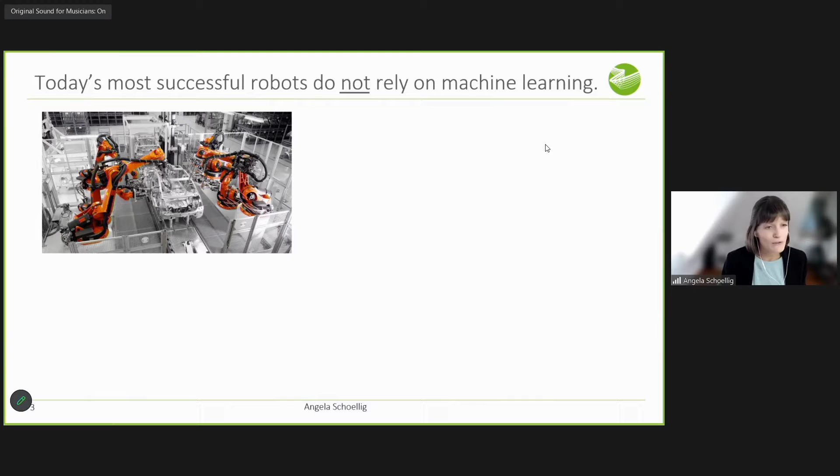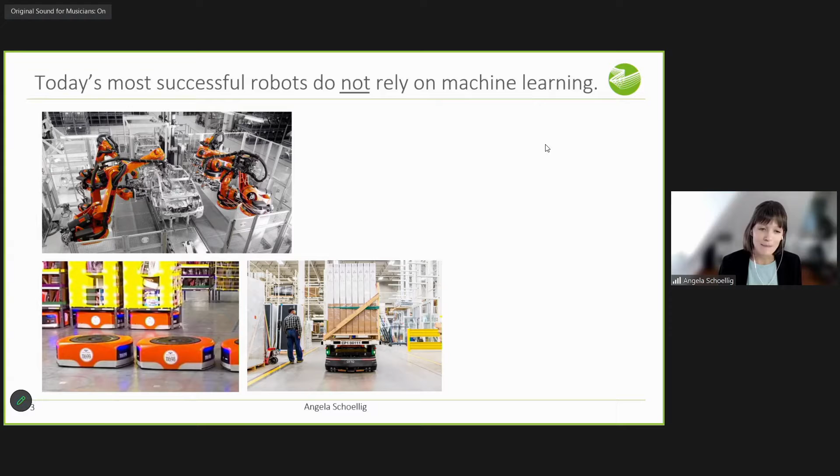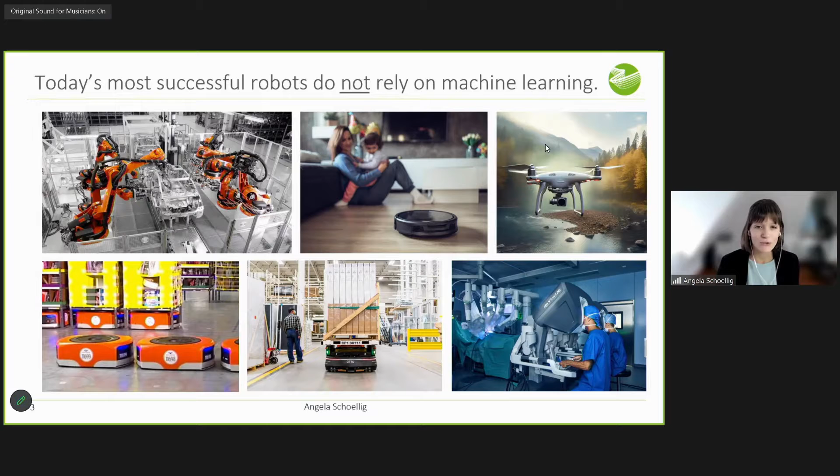And maybe we should also put there a question mark. I mean, can we? Because if we look at today's most successful robots, they do not rely on machine learning. Most of the robots are still in an industrial setting, in industrial manufacturing, in warehouses. Here we see also a Canadian example with OTTO Motors. Some of them made it into our homes as vacuum cleaners or as flying cameras. But none of these examples really rely on machine learning. And neither do much more advanced tools such as the Da Vinci robot. So where is machine learning?

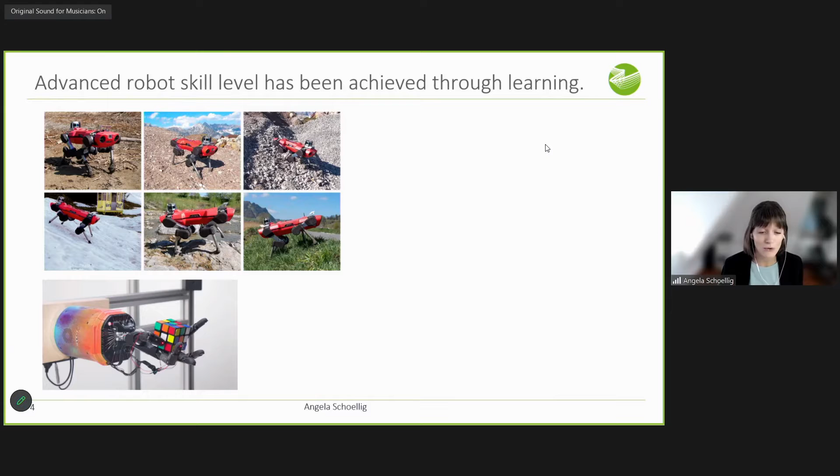In research, we've seen that machine learning really can provide advanced robot skill levels to complicated robots, such as walking robots, where they learn from experience and in simulation how to navigate very challenging terrain. There has been this example from OpenAI, where a robot hand solves a Rubik's Cube, something that I wouldn't know how to do without machine learning. There are other companies that do bin picking, and machine learning has a big impact in this field. And we have seen other amazing bimanual skills, such as opening a lid or putting objects in narrow spaces.

But so far, those techniques still require massive compute and data, often rely on high fidelity simulations that are not easy to come by, and transferability of the skills is still a challenge. So they can maybe demonstrate this in the lab, but can they demonstrate it in the real world, in real applications and as a product? And typically, these approaches also have no guarantees of safety and performance.

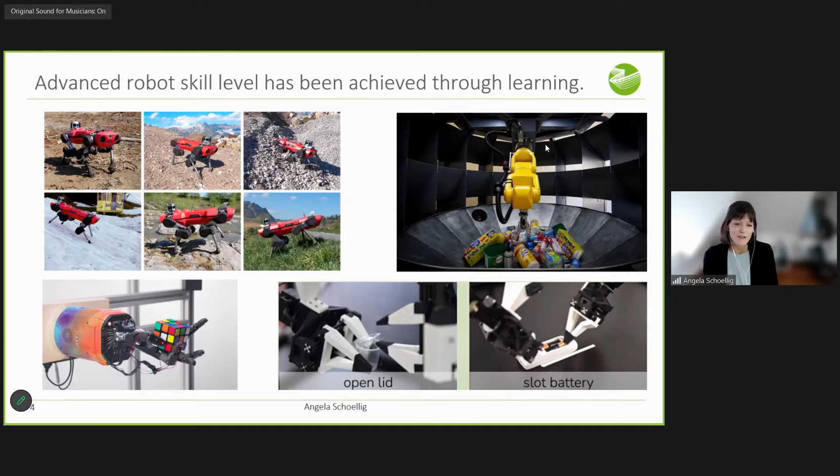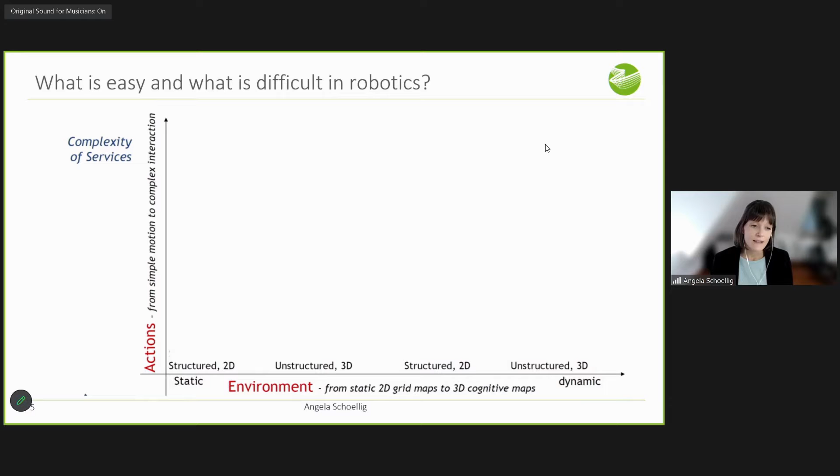So maybe we'll take a step back and think about what is actually easy and what is difficult in robotics. Here I have this two-axis grid where on the y-axis I describe the complexity of the service—how difficult is the task that a robot should do? That ranges from a very simple, repetitive motion, like an industrial arm, to complex interactions with the environment. And on the x-axis is the environment they operate in: is it very structured and known, or unstructured, with lots of dynamic objects?

And so the majority of the robots in the first slide I showed you fall in this bottom left corner. They can do partially amazing skills—here you see the Boston Dynamics robot doing a flip, right? But this still is a single task in a very well-known environment. And so these tasks are generally easy, and usually they are solved by control theory in a model-based fashion because we know everything about the task and the environment ahead of time.

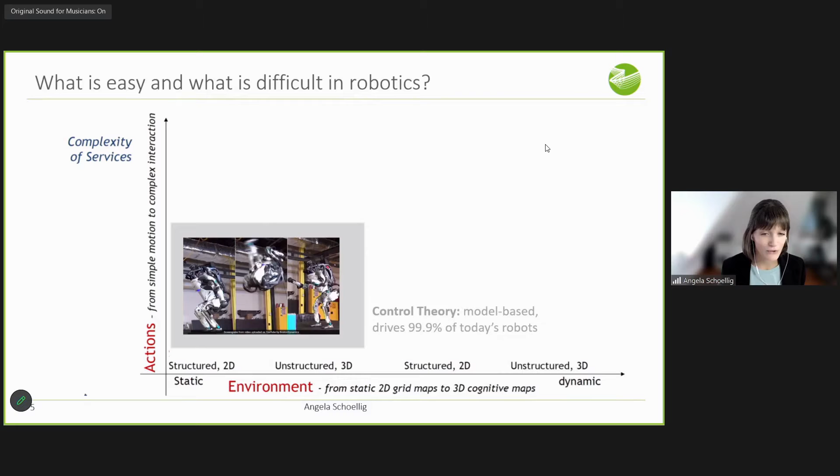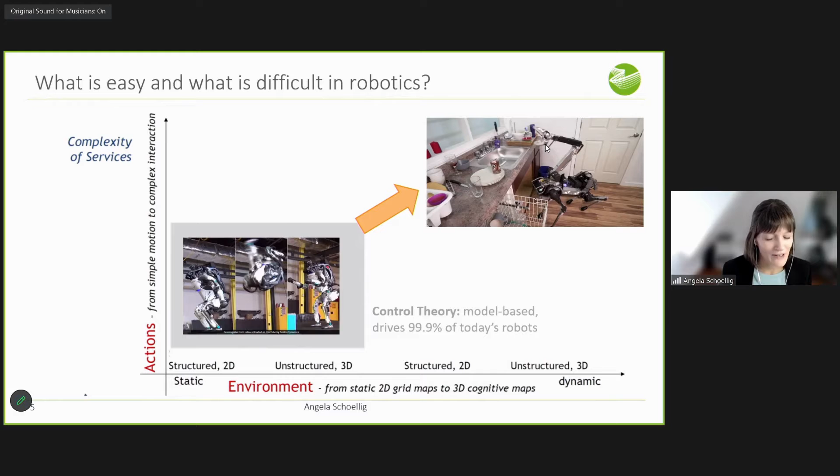However, if we aim to move robots out of those application areas that we saw initially, where they have made very important strides, we want to move to the top right here: unstructured environments such as our homes, hospitals or roads, and very complex tasks and interactions with the environment, interactions with humans, and high-level instructions where they have to decompose the task into multiple steps. And if we want to go this path, a model-based approach where we rely purely on our a priori...

I'm so sorry, I don't know where I cut out, and I hope it was not on my end, but maybe it was.

I'll share again. Yeah, was it where I dropped out? Yeah, this looks like the slide where you dropped out. If you want to just pick it back up, we're good to go. Thank you, okay, sorry about this.

So we want to go to the top right, where robots have to deal with increasing uncertainty as they get closer to us, because they operate in our human-centered environments, in environments such as hospitals, homes, and on our roads, where safety is an absolute requirement.

So I started my journey at the bottom left, and I want to briefly highlight how we have solved problems in the past and how we can expand from there.

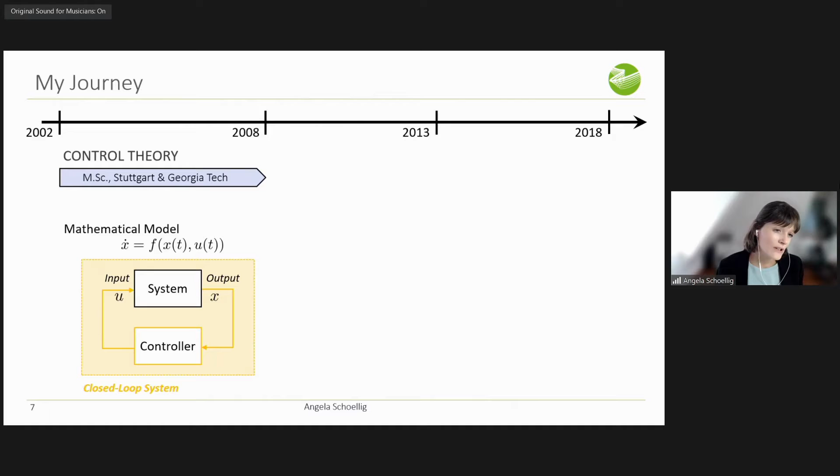So I started in control theory, and control theory means understanding dynamic systems, so systems that change over time, and then controlling them such that the closed loop behavior is the one we intend to have, right? And so this controller is designed based on a mathematical model that we have of the system.

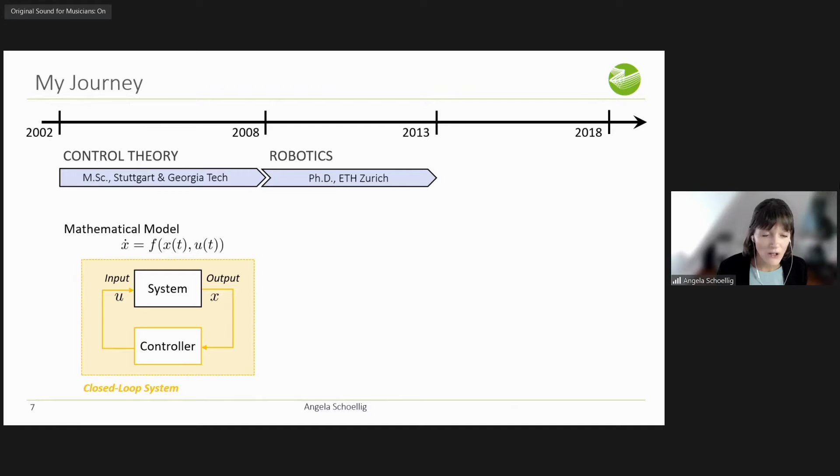Some of you may have seen this in courses. And then we want to achieve behaviors with robots using control theory. So in my PhD, I worked a lot with flying robots, and I want to show you one example from that time.

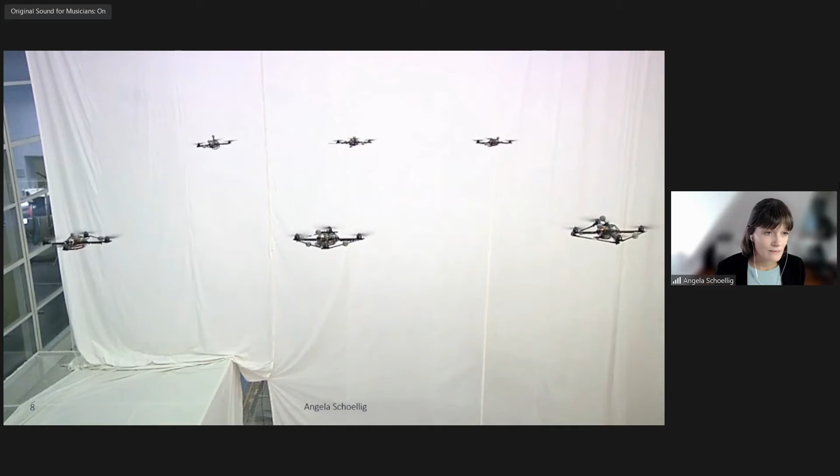In this example, robots moved along with music, and I hope you saw that and heard some of the music. So over 2.5 years, we created 6 choreographies of an increasing number of drones, ranging from 1, and at the end we had 6 drones, as you saw in the video.

How did we do this? We analyzed music ahead of time. We associated motions to it. So as humans, we did the choreography, we did a design, we used motion primitives such as circles and periodic motions, and those would be fed into a small trajectory adaptation module. You could call it a learner, but it's a very minimal parameter adaptation, and then they would be executed by a controller, and we would estimate the position.

So it was a hand-programmed choreography, you could think of each choreography as one single task in an open, empty space where the vehicles were very predictable. Nevertheless, this actually led to a performance on Broadway where a similar choreography was running in a Broadway show for over a year.

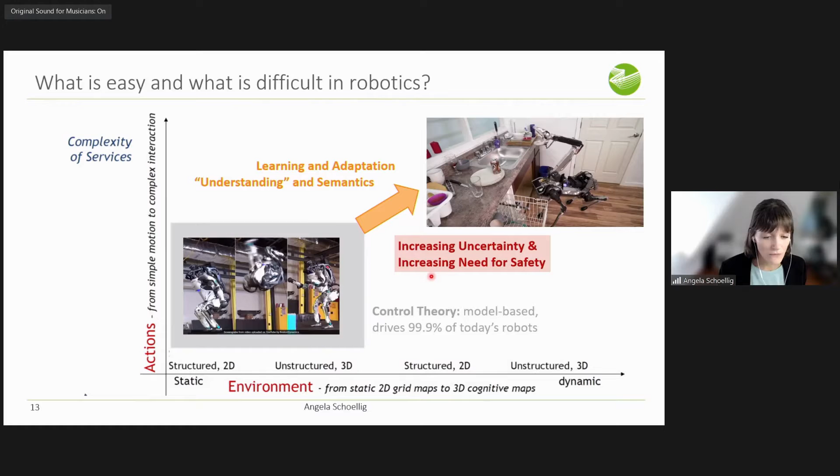The key part being, how do we deal with this increasing uncertainty while also having an increasing demand for safety? So the question I really want to answer is, what are the first steps that we can do to achieve safe and high-performance robot control despite uncertainties?

And so now I dive a bit more into the math, and later I come back to a few more high-level thoughts.

So robots' behavior in the real world is always in some way uncertain. There's noise, there's friction that changes, there is, with the more and more use of the robot, the behavior changes. And one way to model this is by saying, I have a very good a priori model of the system from physics, but there may be unknown components and there may be random noise.

So something that has a zero mean. And the same for our measurements. I may have a measurement model, but I also may have some noise. So this is the type of uncertainties we consider right now. It's still very agent-focused in a sense.

And the second question is, what do we mean by safety, right? I think that is also a question to answer. And there are three things that we mean by safety. State constraints, meaning that the robot stays in its limited space boundaries. This can mean, for flying vehicles, the room boundaries. For a self-driving car, this means staying on the lane.

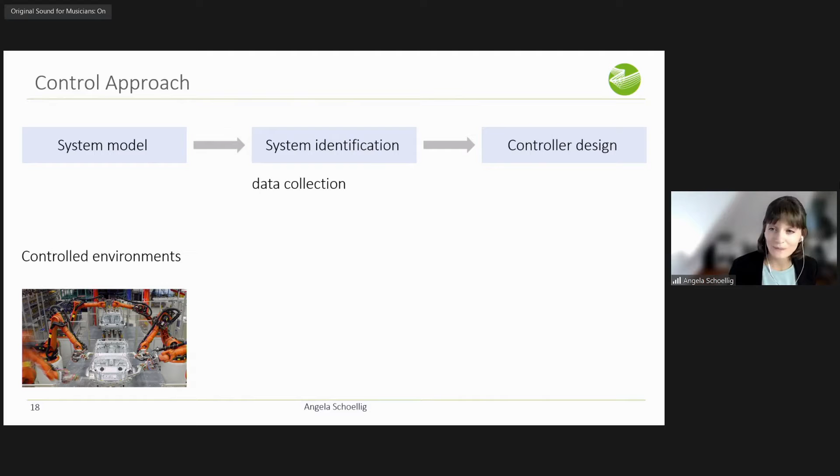The really nice thing about this approach is that we can actually test how robust we are towards errors. So even if we identified our model parameter slightly incorrectly, would we still stay stable and not hit the wall boundaries?

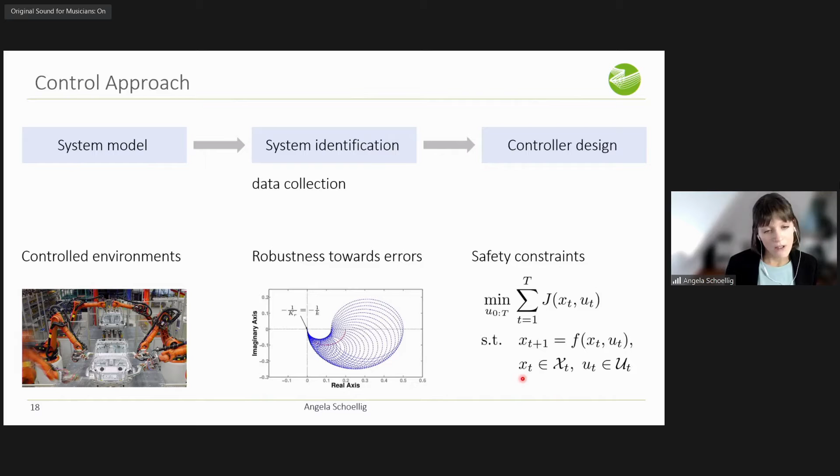We can even explicitly take those safety constraints into account if we follow more of a model predictive control fashion. If we had known that the mass of the robot is between certain boundaries, and we know a lower and upper bound, we can also take this into account and design a controller that works for the whole range of parameter settings. And that is called robust control.

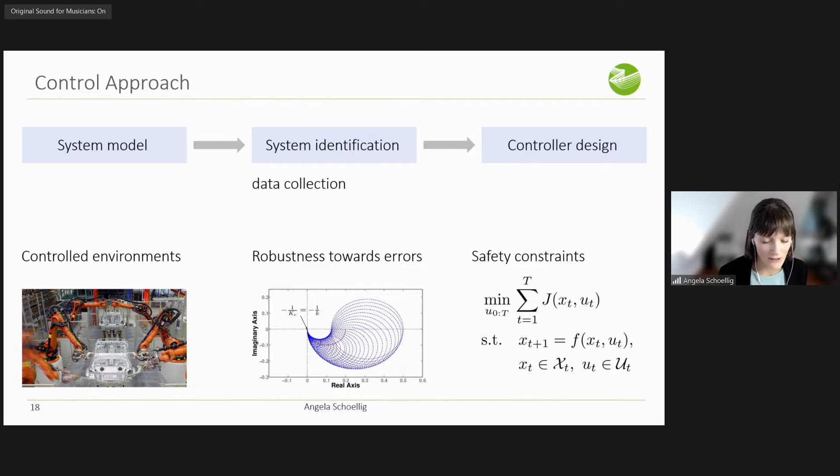But it's important that usually every normal controller you design, even LQR, has certain robustness guarantees, so can handle a certain amount of parameter uncertainty. And I show you a few examples just to show this can work. Works really well. Here, we try to introduce different disturbances.

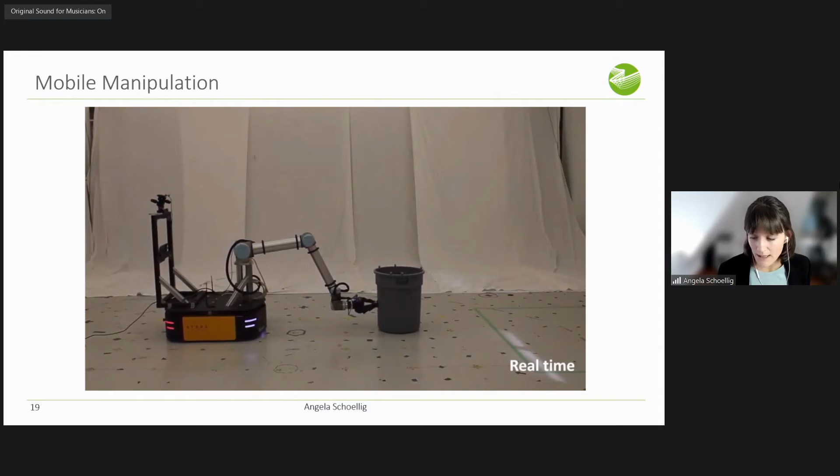Kick the bucket, and the robot can control this. Right? We don't need any learning for this.

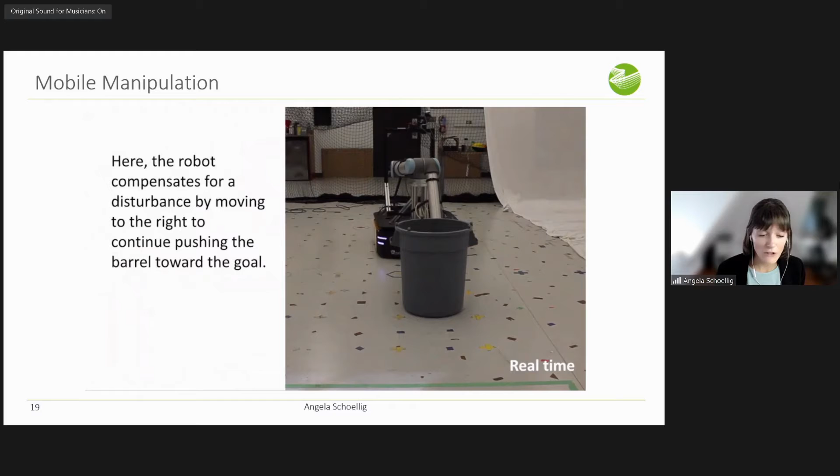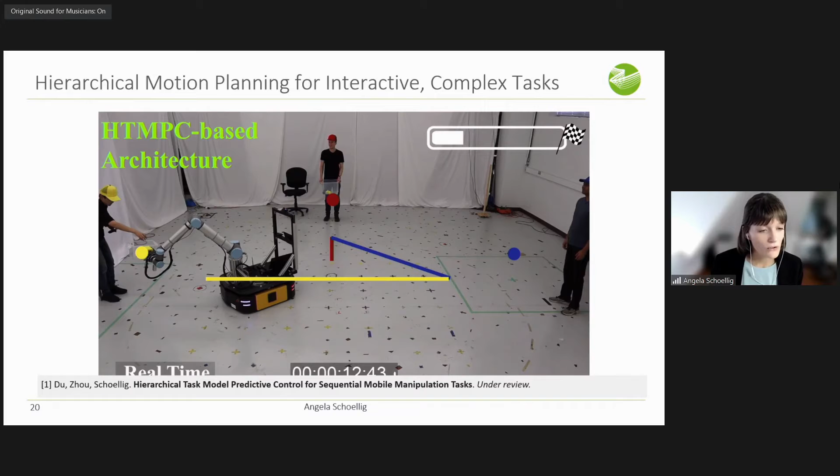Here we have a very recent work. Here we do a full body motion of the base and the arm, where the base already moves to the next person, while the arm still hands over the ball. So again, here there are model uncertainties, different friction coefficients, and still this works well.

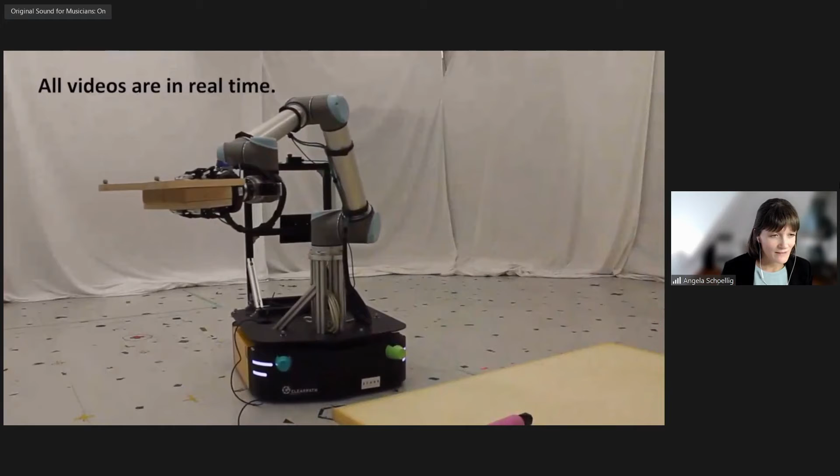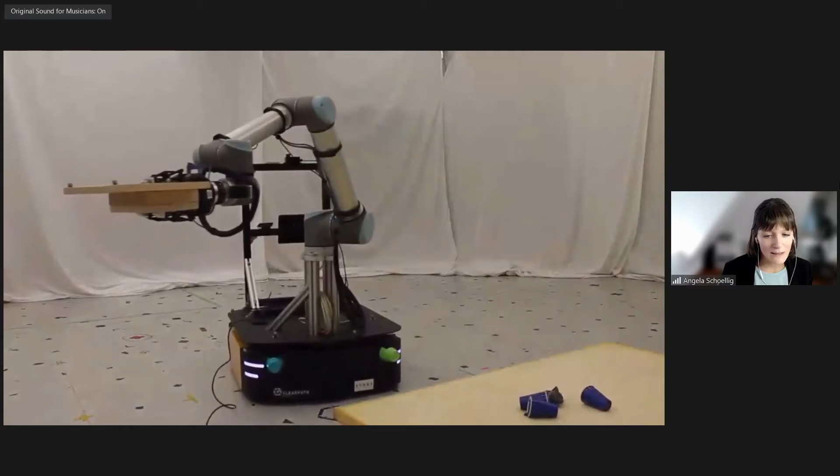And finally, maybe the best example of all of this is where we actually approach the problem as a robust control problem. So here we want to balance objects on a plate. And if we don't take into account that there could be objects on the plate, they fall down. But then we could make a conservative estimate about the objects on the plate, that they have a certain mass and certain inertia.

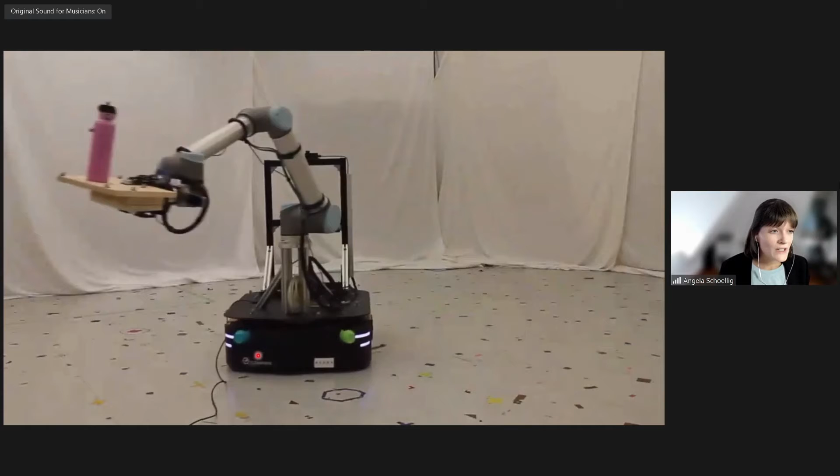And if we do that, then we don't need to know exactly what is on the plate. We don't need the exact properties. But with a robust control approach, we can balance the objects.

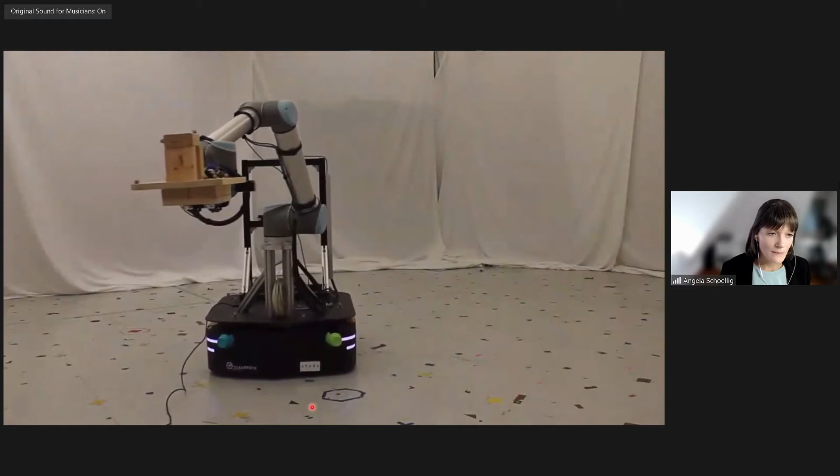I hope you can see those videos. So a model-based approach has a lot of advantages, and in a robust setting can even account for various variations in the system, even the object you balance and transport.

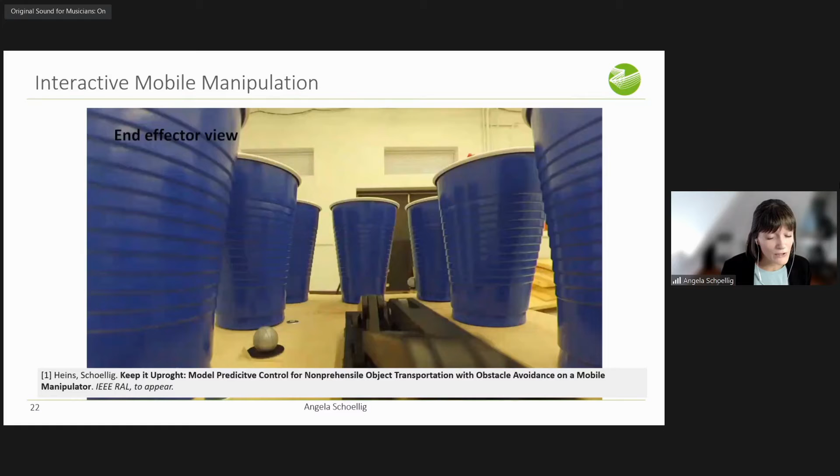So this is if we go at this problem from a completely model-based approach. The other main direction people have been pursuing is completely learning things from data only. This is usually from the reinforcement learning community, where they don't assume they know a model. Sometimes a model is very difficult to get, and instead they work with data samples only to optimize a controller. So the learner is the controller - it tries actions, sends commands to the robot, and observes what happens. Initially these are random commands, and over time it learns what actions actually get the task done.

It's also a very task-specific approach, because it evaluates the actions against a reward, against a particular task that needs to be done. But it collects relevant data for this task, and it tries usually to optimize the performance in terms of expectations - the best expected performance over the long run. So that's how it deals with uncertainty, trying to maximize the expectation of the performance.

It's still usually in a quite controlled environment. But there have been amazing progress based on reinforcement learning if models are really hard to come by, which in robotics is very quickly the case if you have interactions. However, many of the early successes are still in lab settings or in simulation environments that have very little noise.

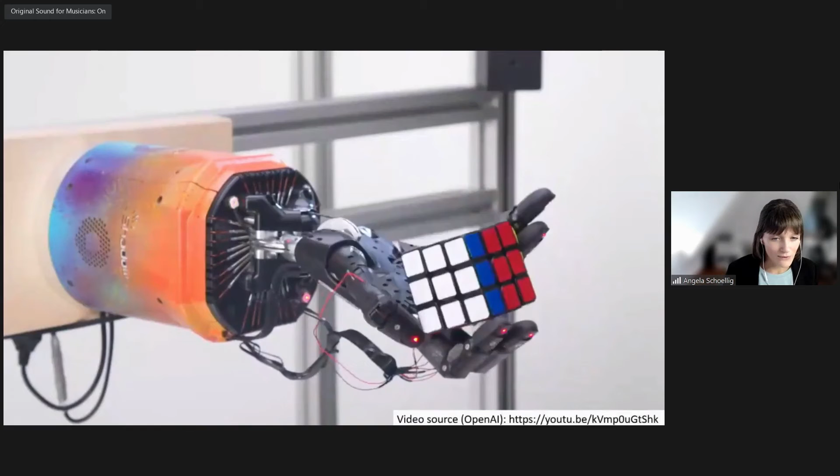One more recent example that was quite impressive is where a real hand solves a Rubik's Cube. This is a difficult task on its own, and then with a real physical hand. The thing is, what you don't see is that this only works 1 out of 5 times if we have a hard combination. So only 1 out of 5 times this reinforcement learning algorithm actually achieves the task. Otherwise it either gets stuck or the cube falls down. So if it would be a safety critical application, that would be absolutely not enough - doing it 1 out of 5 times correctly.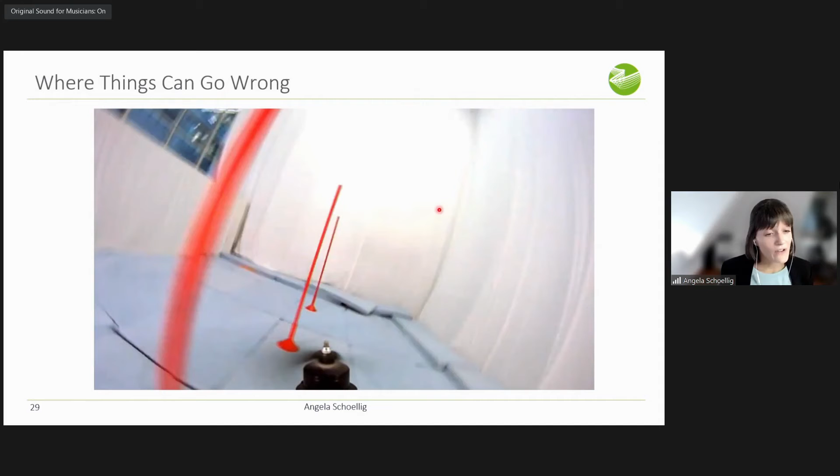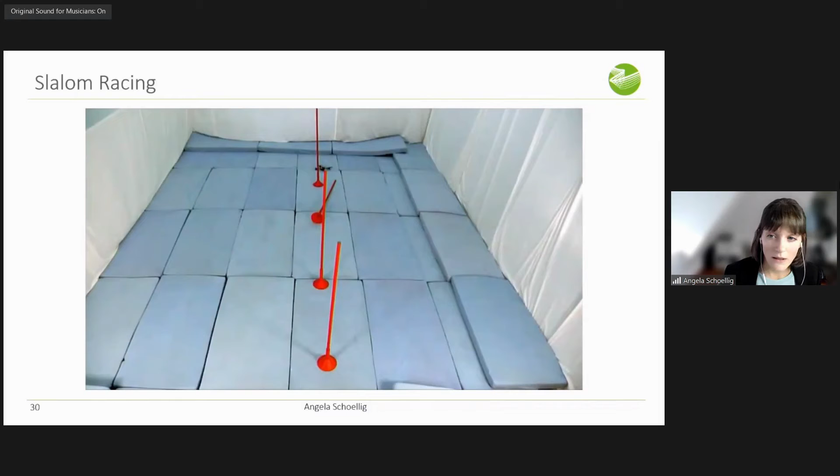And so we did this for slalom, flying there without learning. There are just too many uncertainties that were not considered. But we can learn the residual model error in a few iterations.

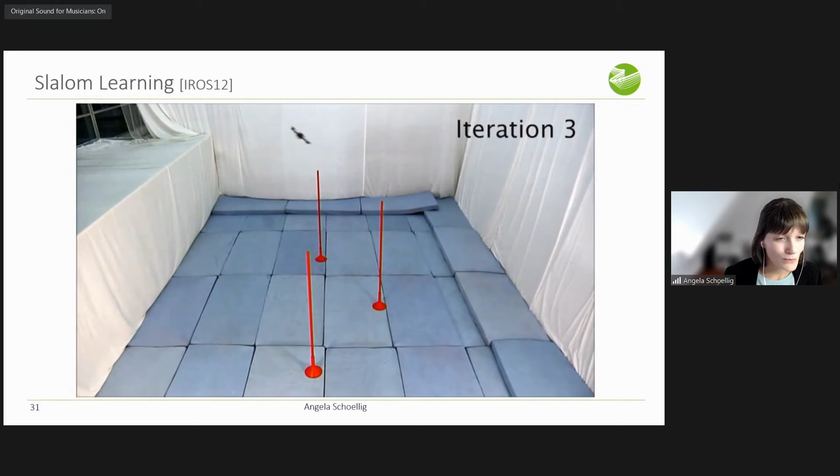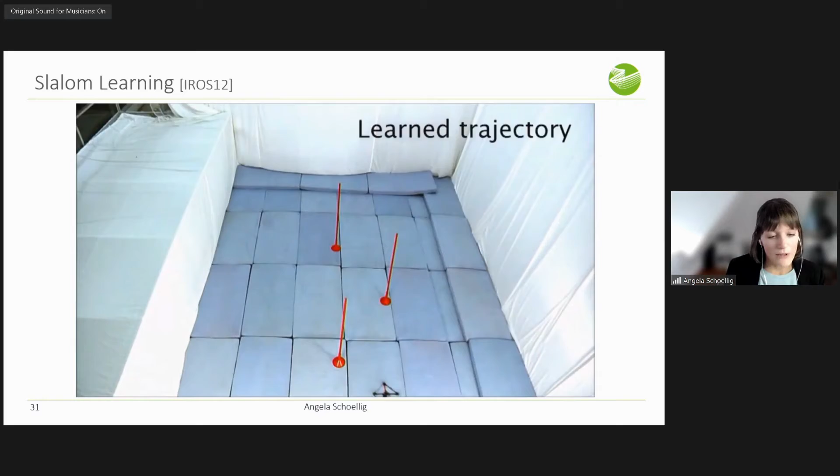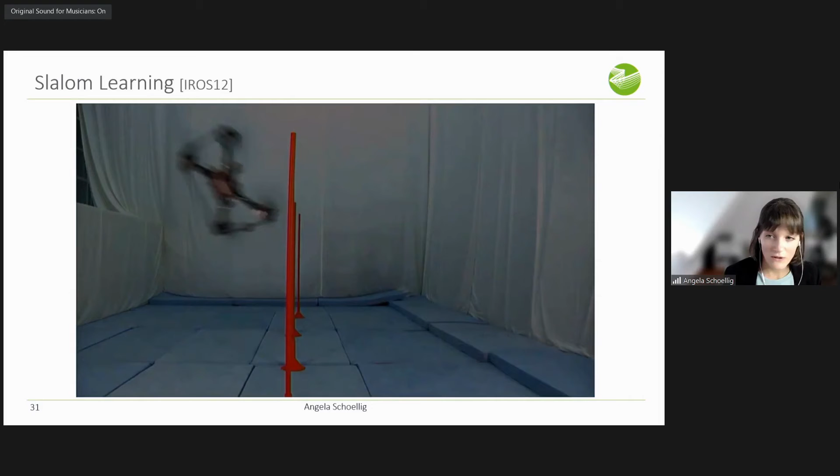I hope you can see it, otherwise I can send you links to the videos later. So we basically just have to learn the systematic model error, and since we correct immediately in the right direction, thanks to our simple model, we can do this very quickly. We can even learn things like a triple flip.

So the drone should do 3 times 360 degrees of rotation and come back where it started.

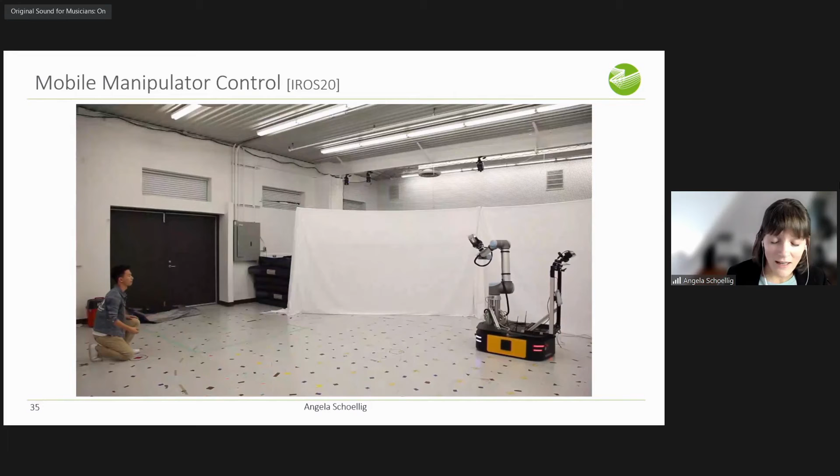So while this was still a bit of an academic example to show this, we also used it here when we want to show how precisely we can move a mobile manipulator to catch balls, where it needs to be very precise in time and space.

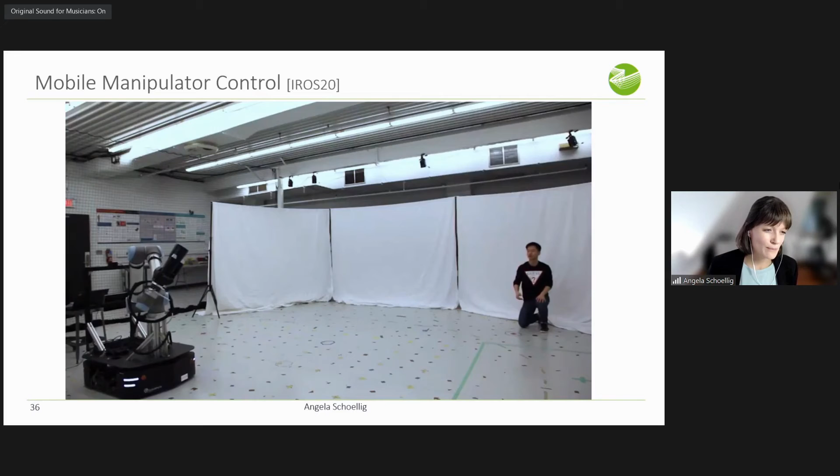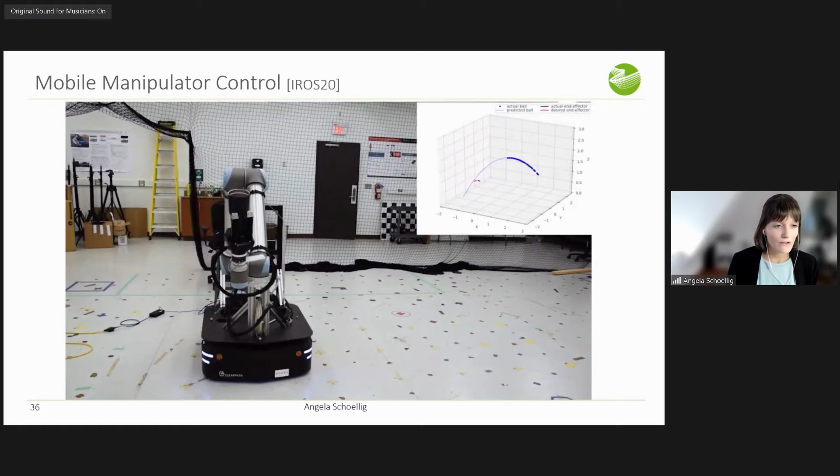And so here we use the same approach to add on to the existing tracking controllers of the base and the arm. So that's the nice thing about this approach as well. You can tag it onto any approach. You don't need to know the underlying controllers. You don't need to modify them if you don't have access. You just add it on top, and you can generally always improve the performance of the system.

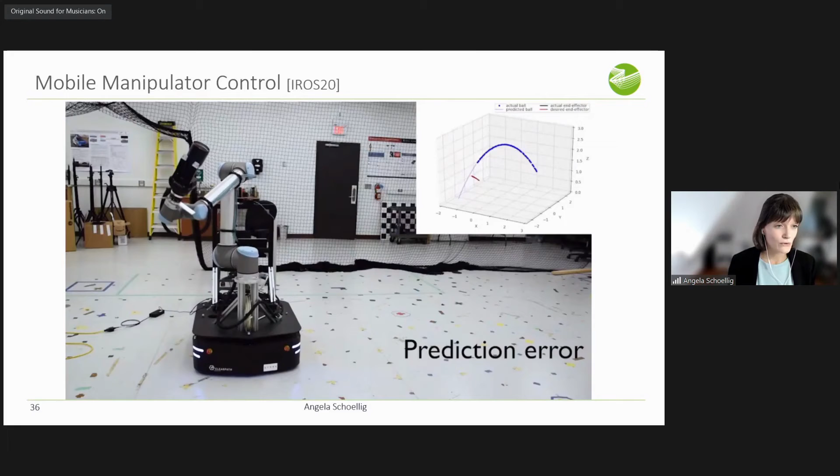You see, we are not perfect. Here we have a prediction error of the ball, and here we are not tracking very well.

So finally, one thing in this direction of an architecture is, what about if things change? If the system over time changes, or I learn something on one flying robot and now I want to use it on a slightly different one. Again, you can play with the feedback architecture and the feedback rates as well.

So the thing that now changed from the picture before is that we replaced the normal controller with a very fast adaptive controller, very quickly adapting to changes through feedback. So basically a quick self-tuning controller.

By doing this, and again choosing approaches where we have guarantees for the red box - for example, L1 adaptive control, as well as Lipschitz neural networks that we use - we can actually prove stability and also that the tracking error converges. One approach we use is we put a small neural network here that has a Lipschitz constraint, so it's a Lipschitz network. We also used L1 adaptive control.

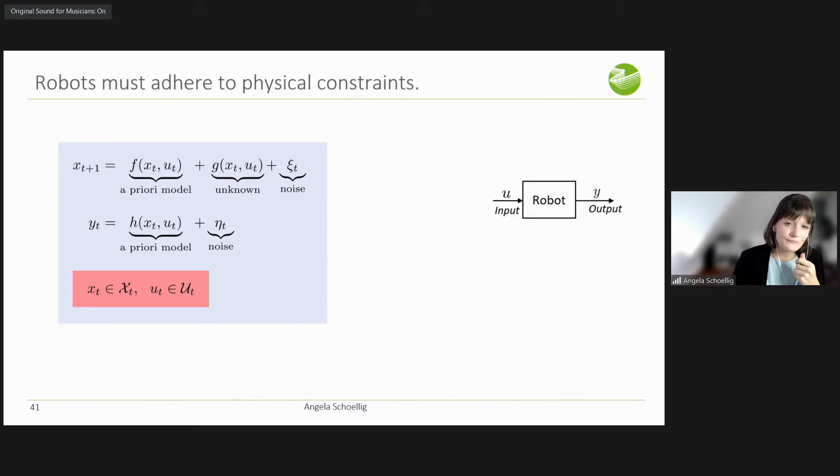So we have the same setup, and now the block diagram looks slightly different. Now we rely on learning the uncertainty in the model as the robot operates, and still doing this in a safe manner. For this, we use a probabilistic model called a Gaussian process and couple it with robust control.

And if we do this, what is different to a normal model predictive control is that basically we say with high probability, I want my state to satisfy the safety constraints.

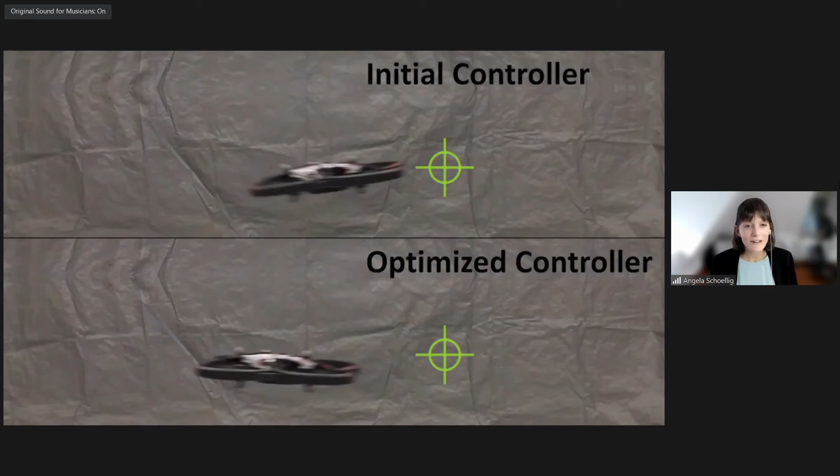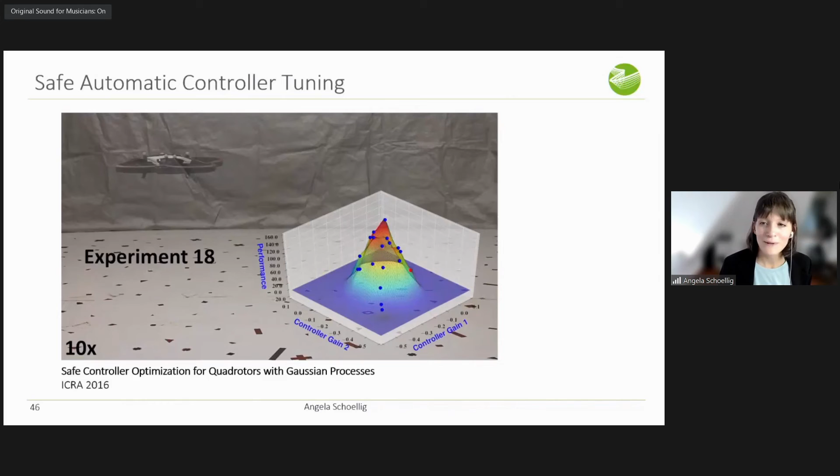We also made it a more generic approach to safe model-based reinforcement learning. One thing I want to show is we can use it to automatically tune controllers in a safe manner. Often you've tuned your controllers yourself in experiments, but you can get help with this type of approach.

So what it can do here is we can guarantee stability and performance. We don't need a training phase, and we can consider state constraints.

Of course, there are always limitations, and these are the overall setup I proposed at the beginning. We assume it's a disturbance that acts on the dynamics of the system directly. We make some smoothness assumptions, and certain hyperparameters of this Gaussian process may also not be easy to know ahead of time. Nevertheless, this is an approach that explicitly takes into account that there's uncertainty in the environment, which over time you may be able to find out from your data and reduce your conservatism.

The last thing I wanted to talk about is that there are two main communities dealing with control of robots in the broadest sense: the reinforcement learning community and the control community. Both are interested in working towards safe learning in robotics. So we did a broad review paper during the pandemic on this topic, because both communities are approaching each other, recognizing that data and models are very important to make progress in robotics. I highly encourage you to look at this paper if you're interested.

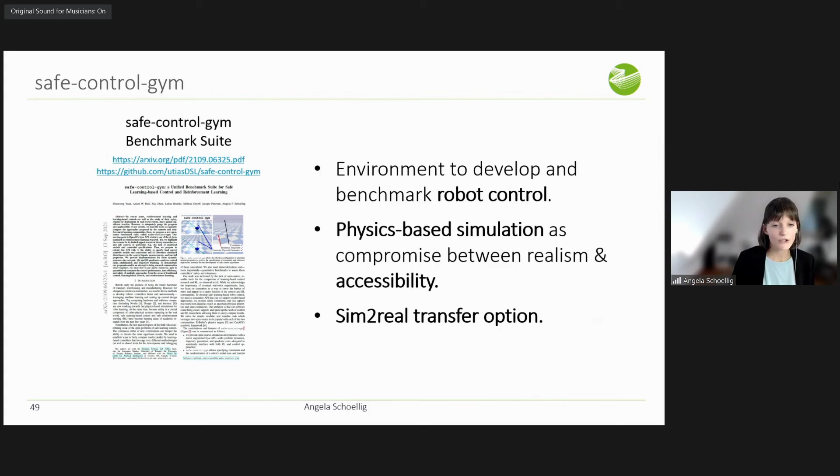And we have even for the quadrotor now a sim-to-real transfer option. So if you do a lot in simulation, we have a direct bridge to transferring onto a Crazyflie drone. Here you can really define prior knowledge and see how much your knowledge about the environment helps you do a task. You can define safety constraints, different disturbance injections, and we have certain simple systems like a cart-pole and a quadrotor, with tasks such as stabilization and tracking, though we're also expanding on these.

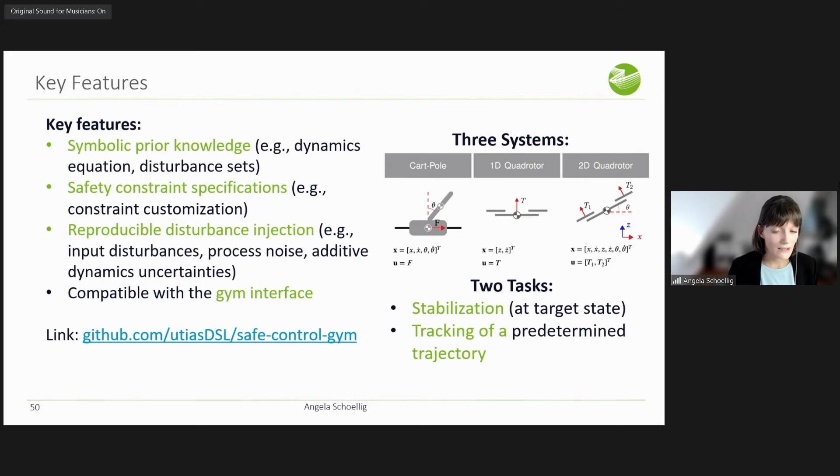But no matter if you do any work on the control side of things—model-based, model-free, or learning-based control—I highly encourage you to have a look, because lots of the standard approaches have been implemented, and you can compare your approaches against those: standard RL and control, but also some of the latest safe RL and safe learning control. We are just exploring this ourselves; we don't know yet where this will lead us, but it's the first kind of software framework where we can actually explore how prior knowledge helps us or limits us.

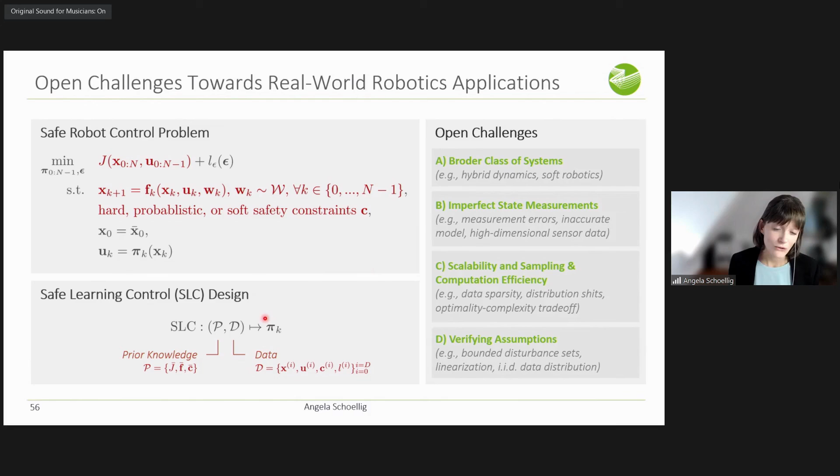One open challenge that I find very interesting, and we've done some preliminary work in this direction, is that robots infer automatically what is safe. I think we are close to being able to do this because they can semantically understand the environment and, for example, understand what each object is and how to safely interact with it. So that's also really an interesting direction.

So to finish this, the take-home messages are: machine learning will be and is essential to build more capable robots. Leveraging prior knowledge about the structure of the problem will help us design efficient and safe learning algorithms. I think there's no question about that. And I also want to emphasize that as roboticists, we design the closed-loop behavior of a dynamic system, which is quite different from other types of machine learning problems.

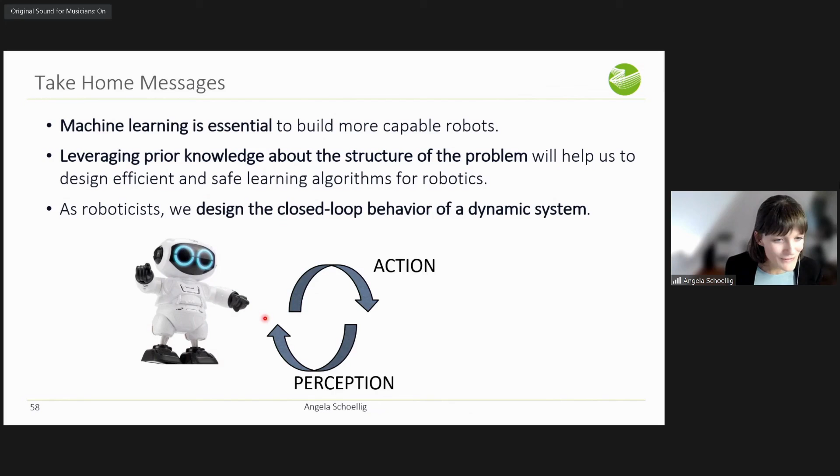And just for a fun last thing, what actually happened with these dancing drones: we recently took this on again and designed countless choreographies, not only 6, in 3 months instead of 3 years, with up to 9 drones instead of just 6. And now it can be programmed by non-experts. So how can this be?

In short, we combine some prior knowledge and pre-processing, but now we let a large language model actually design waypoints that fit the music. And then we pass it through a safe planner, safe trajectory optimization, to make sure we are collision-free. A large language model would not be able to do any of this on its own.

And we can also check in simulation, but then we can run it on the real system. We can even reprompt and say things in natural language, such as fly faster or further apart. So I think this is just showing that we are living in exciting times. And so here are just some last examples. This was purely designed by the large language model.